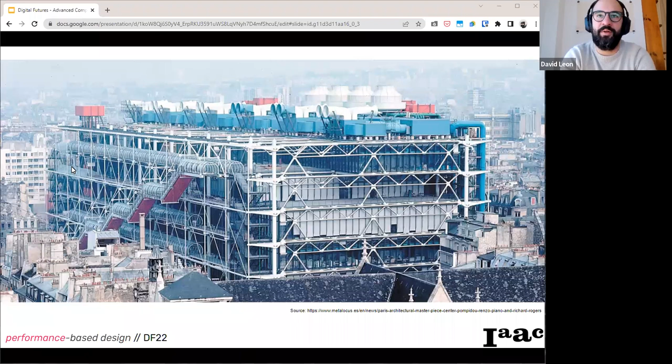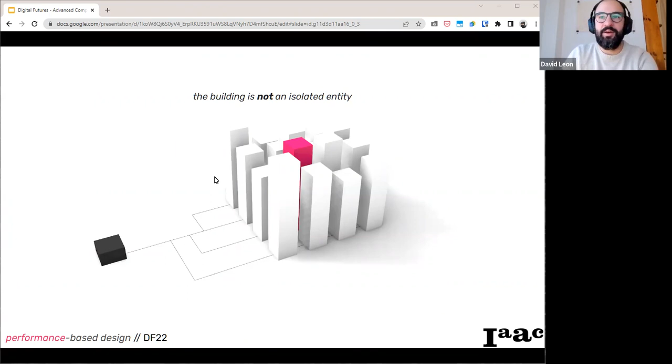That is to say that the building is not really an isolated entity, right? It's actually an entity that is part of a network, part of a community of other entities of the same nature, meaning other buildings, but it is also connected to a bigger network of relationships through energetic consumption, materiality, and its immediate context.

So a building nowadays, or even from the beginning of the history of buildings, has to consider its materiality. What kind of resources has it used to be built, to become a building? How does the building actually affect its context? Meaning, how does it affect other buildings, for example, by limiting or enhancing the energetical consumption of the other buildings.

A building also has a great impact in its community. And how much natural energy does it profit from, right? How much natural energy does it take? How much artificial energy does it consume from a network of energy consumption? That is something that is very well assumed in our days, right?

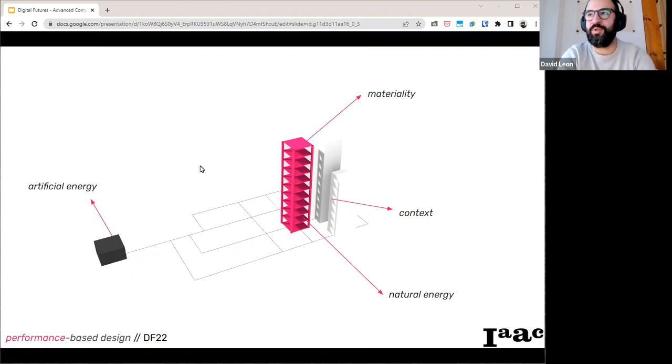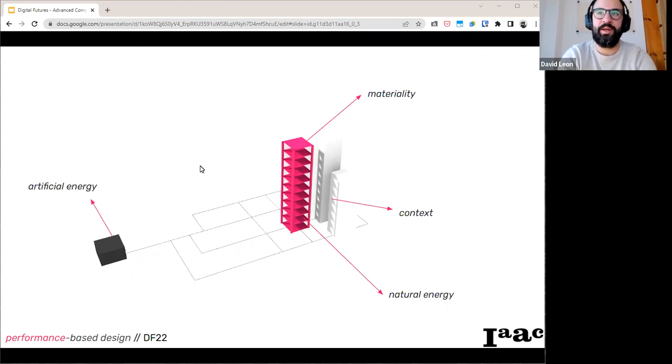That we can just plug a building into a network of energy, and the building will just provide us heat or cold, or power for our microwaves or our lights. But the very act of us subscribing to such a network also implies that the building in itself is part of something bigger than itself, right?

So if we translate these concepts from the ways in which the building is connected to its context, to its environment, we can start to talk about the different functions or performances that the building can have. In terms of materiality, what it actually takes for the building to stand, meaning structural performance, right?

In terms of energetical consumption, both artificial or natural, how much does the building interact with the environment, or environmental performance, right? How much energy does it take, or how much energy does it provide? And in terms of the context, how much impact does the building actually have in terms of the overall performance of its context?

By casting shadows on another building, a building might actually be subtracting from the overall energetical consumption of an urban space, or just by the main disposition of the building, it might have different consequences. That is something that I'm going to talk about a little bit more in depth in practical terms in the examples.

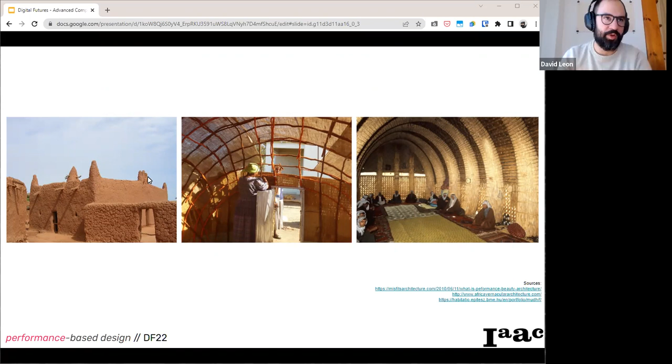Resulting in a specific shape that would be the direct manifestation or response to an environment, which is what we're talking about. And then, after many years, the decontextualization of such, where a lot of the ways that we build nowadays can be perceived as very repetitive.

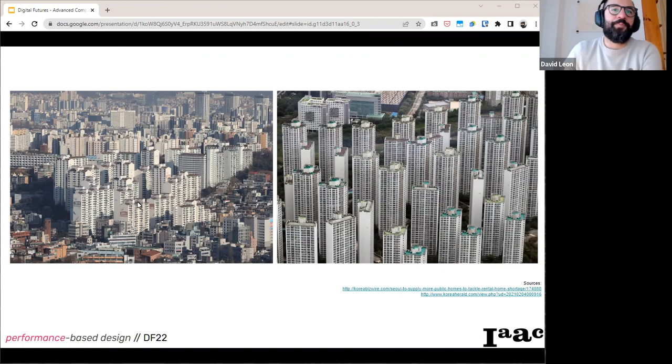We're basically not considering these very important factors anymore to produce our buildings, often for the benefit of profit or for economical motivation. Materially, energetically and urbanly, we have throughout the years somehow put these very important concepts aside in order to get the most of it.

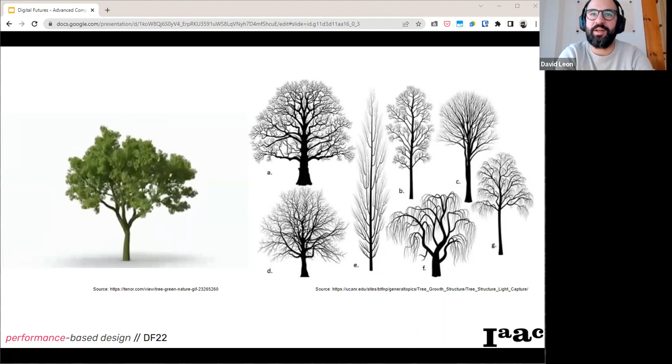So that's to say, a tree, for instance, according to the requirements that it might have, both structurally and energetically, is able to adapt its form and grow in the search for such requirements, structurally and environmentally, with the due process of adaptation. So you can see the manifestation of the same tree, for instance, in many different morphologies by the different requirements that it has in terms of its energy and structure.

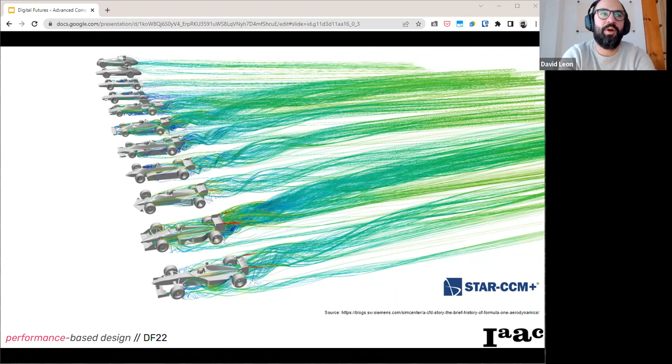What is interesting is that in the same example of cars, in automotive, this speed performance can also be quite tightly related to its energetic performance, because as you know, a car has to basically withstand its drag in order to overcome the friction that it has to move through, and by that it actually requires power.

That power comes from energy, and that energy comes from resources, which is basically always related to the context, even though that's immediate, like in the case of solar energy or electrical energy, or if it's not so immediate, like in the case of fuel, right? But in any case, the point being, the more performative in terms of shape a car can be, the less energy it will basically consume, right?

The more aerodynamic a car will be, the less effort it will take it to travel through space, faster, but also with less energy consumption. So the point being here that the shape of things is actually quite important for certain performances to be measured or to be improved, depending on the function that we see.

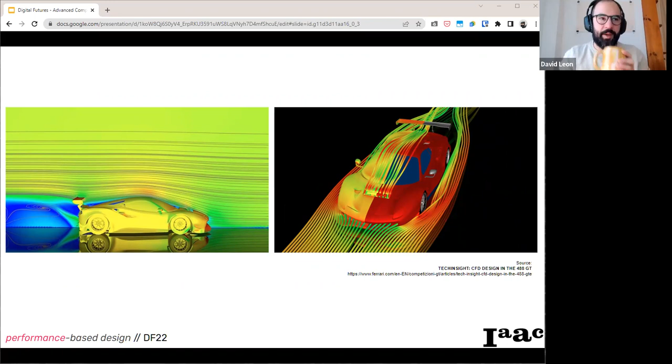This concept, of course, has been adopted in many industries, not just the car industry. For example, the aerospace industry, in which, of course, a lot of inspiration has been drawn from nature, right, to solve specific issues like aerodynamics or such. And I usually would play a video here that I'm not going to play today, which talks about how the bullet train in Japan actually had a specific amazing problem, which was that by being so fast going through tunnels, it would create what is called a sonic boom.

And because part of the engineering team included a biologist, it actually drew part of the shape of the bullet train in Japan, right? It drew inspiration from a specific bird, which is called the kingfisher, to adopt the shape of the nose of it in order to overcome these problems.

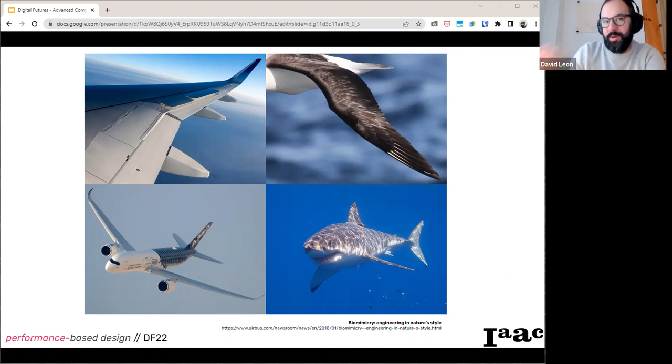Now, what you can see here in the images is something kind of in the same nature, but it's also very important to highlight here that biomimesis is not really the same as biomorphic, which means one shouldn't really fall into the trap that we must actually copy exactly the forms of nature that are out there, right?

One thing is actually to have the exact same shape of something, which is being biomorphic, taking the shape of something, and biomimesis is basically taking the inspiration from nature or from the concepts that are in nature to be able to adapt them to different domains, like is the case of the aerospace industry and many others.

Also talking about performance, but in this case structural, there is another example that is rather more close to us, which is basically the way that our bones are designed, right? And through this amazing principle of homeostasis, our bones are able to adapt structurally according to the different weight loads that we inflict on them gradually throughout our age, throughout our growth period, but also throughout different loads that we can inflict on these bones.

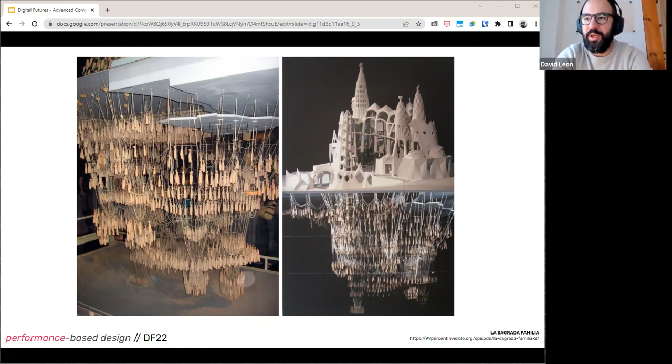Not only because of the aesthetics and the creativity of this formal process, but it actually encapsulates an amazing concept of performance that is quite simple, right? It was basically expressed by Hooke in Hooke's law: as the chain hangs, the inverted form would be the perfect shape to withstand gravity. And that is basically the challenge of the construction of the Sagrada Familia, to build such high towers and such complex dispositions into one building that is going to be probably one of the tallest buildings in Barcelona, designed by Gaudí in another age.

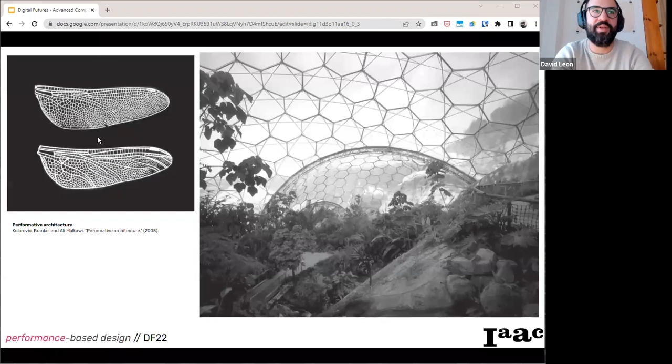This same mentality has been seen and proliferated all over the globe, not only the Sagrada Familia, for example here in the Eden Project, where by the biomimetic translation of certain principles, such as the wings of a dragonfly, you can actually expand and cover huge amounts of area, as in the case of these amazing domes in the UK. But there are other amazing buildings taking this principle forward.

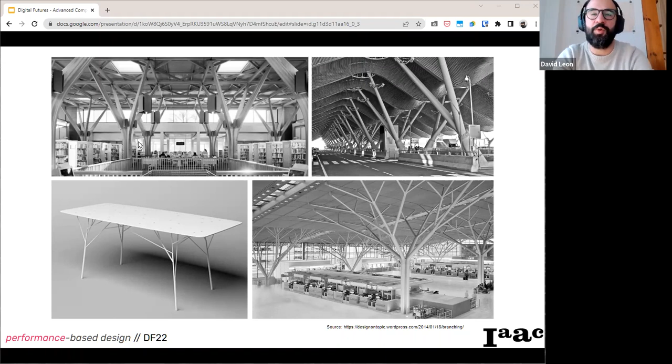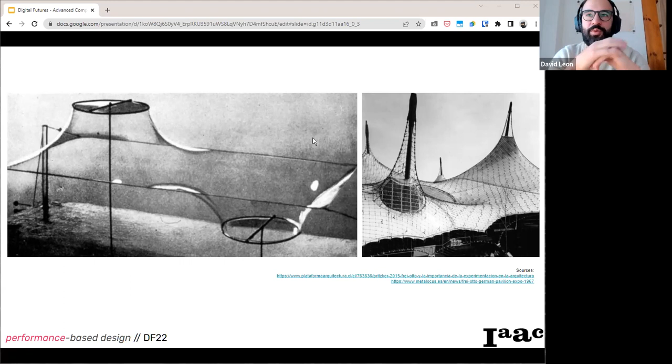So from the need for performance, what we have is another approach to design through form finding, an approach that already incorporates physical forces in prototyping, not necessarily computationally at this stage. In this example of Frei Otto, the soap bubble prototypes find other ways to incorporate material economy and material efficiency. The shape you see here is a minimal surface, basically the shape that takes the least material to cover this space.

So the difference is that, whereas before it would take a lot of prototyping and a lot of effort to challenge these notions and to test these notions, nowadays, through the inclusion of computation, this is something that we can do in seconds, right?

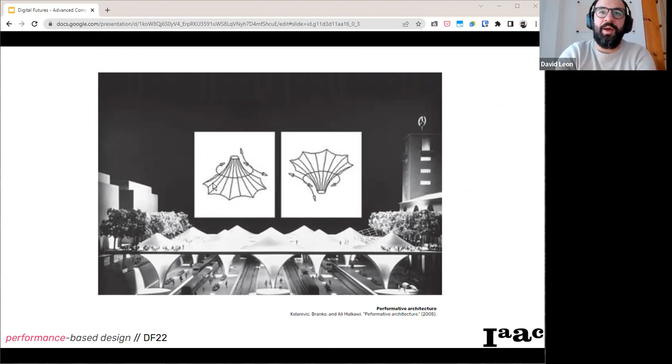For example, here I enter basically what I was talking about in the beginning of the presentation, which is how the tools that we have at hand can constrain or enable or even challenge different aspects of the designs that we have at hand, right?

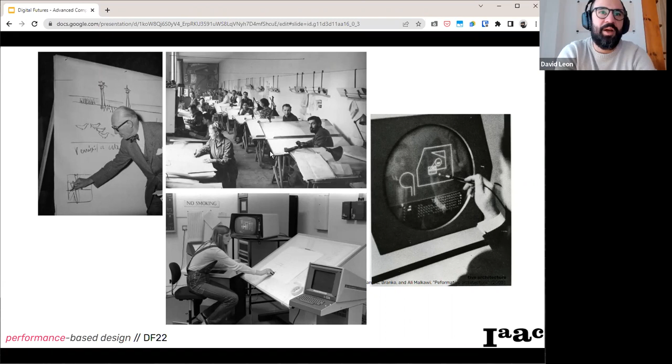And then the inclusion of CAD, of computer-aided design, which basically transferred all of these efforts into the computer, right? First, by merely replicating the same things that we were doing by hand. At the beginning CAD was just a straighter, more precise ruler, like what you would see in AutoCAD classically, right? But then eventually we started to see architecture also as data, right?

And nowadays, the same model that it took Frei Otto months or even years to produce, we can build in a very simple definition in Grasshopper in 2 seconds, right? And get a very nice approximation of the shape that gravity can produce into a form, by hanging it or by inverting it, like we were talking about with Frei Otto and Gaudi.

And this is basically the true power that we have nowadays at hand. Most of us, if you're a student even more, have access to such tools, not only economically, but in terms of the computational power required to run them, and more importantly, the knowledge that it takes to run this is widely available to you, right?

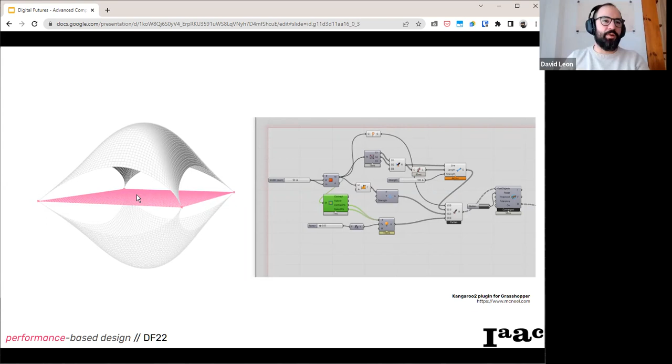I'm not sure how familiar you already are with computational design. I'm sure you're very well versed, but the only thing you need to make this simulation, which is actually a physical simulation done in the Kangaroo 2 plugin, is the composition on the right-hand side that you have to make in this particular software called Grasshopper. This will take you less than 5 minutes to make, to get a very approximate result of the same.

Not only that, but we can actually benefit from a huge ecosystem of tools that not only do Kangaroo physics, like the one you just saw, but provide a vast ecosystem of simulation tools and form finding tools for you to explore and benefit from, which I would hope would be for the sake of performance.

And this is basically what the talk is about: the computational tools that we have now at hand, which are very widely available to you, should be used for striving for performance, which in the end turns into sustainability, right?

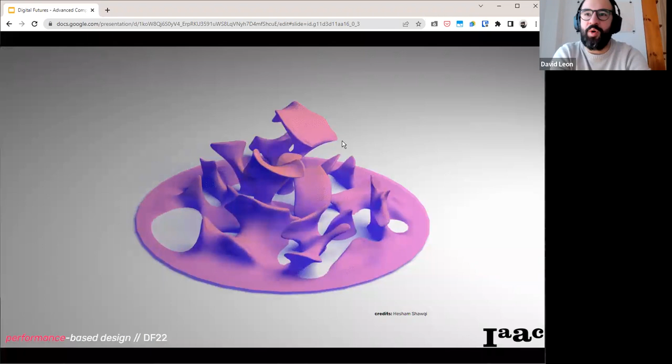So here we can see a quick snapshot of a few plugins available in Food4Rhino, which is where most of the Grasshopper plugins live. But more than a specific promotion of any plugin, it's just to say that we have these tools available to us quite easily and with no great cost. These tools allow us to simulate growth, simulate behavior, right?

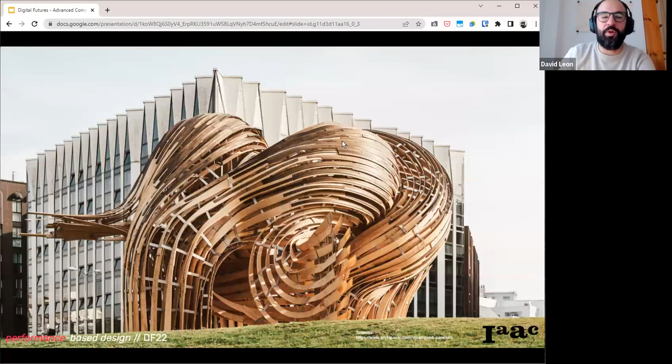These tools allow us to create very complex shapes that normally wouldn't be possible. Credits here to the steampunk pavilion in Tallinn, which was recently standing there in Tallinn, which is a feat not only because of its material complexity, but because it actually requires advanced tools for its fabrication. In this case, this particular pavilion was only possible to be constructed through the use of augmented reality for the formation and location of each of these bent planks.

And this complexity doesn't necessarily have to be curvy or wavy or of a particular aesthetic, but can actually just derive from the complex disposition of very simple shapes, like in this case, wooden struts that generate something very complex.

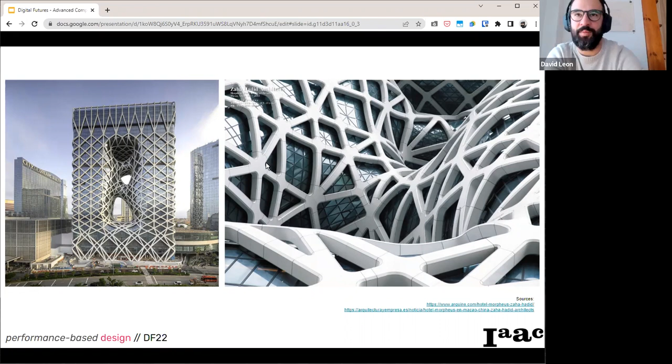And even beyond the pavilion or the demonstrator scale, the same tools that I was talking about before, Grasshopper, for example, and parametric tools can be used to create buildings as a whole, such as the case, for example, of the Morpheus Hotel in Macau by Zaha Hadid, which in great part was actually designed and made with the same tools that you have in your computer today, not only in its very complex facade, but also in the building as a whole.

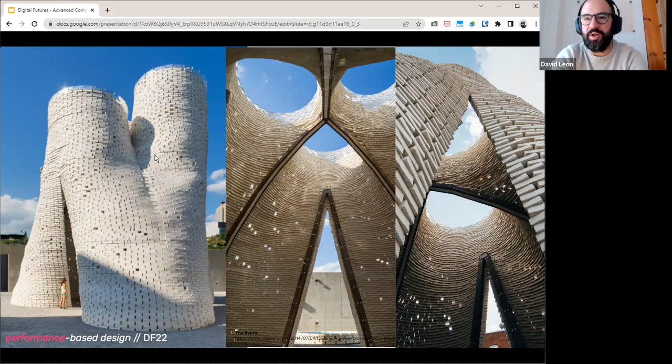Some of the work can also be seen in terms of the material by the introduction of living systems, right? In this case, using mycelium blocks to create complex shapes. And this also talks about material performance, because each of these blocks consumes less energy than the usual blocks that we would be using for constructing such shapes, because they have been grown by nature, right?

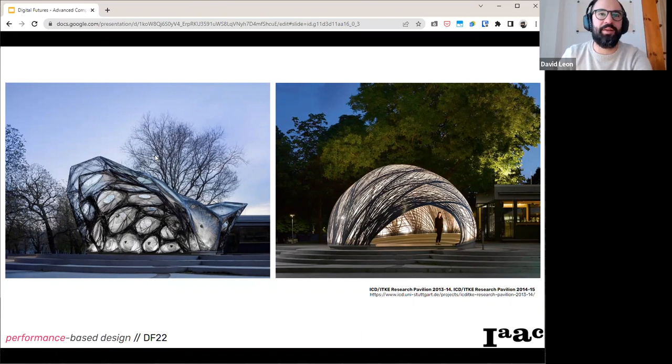And more formally speaking, also the amazing work that's been done by the ICD and ITKE, which I think you guys are very familiar with. I had the pleasure to work on these two pavilions when I was a student, and I can attest that beyond the aesthetic formality and final results of these very nice pavilions, there is embedded a huge deep study on the performance of these materials and the performance of these structures, right?

On the left hand side, an amazing effort to challenge and develop computational tools for performance, both materially but also computationally. And on the right hand side, being enabled only by novel fabrication techniques, like in this case of this bubble, a 6-axis robot arm laying fibers inside of the bubble to reinforce it so that it can withstand when the air pressure is taken out of the bubble.

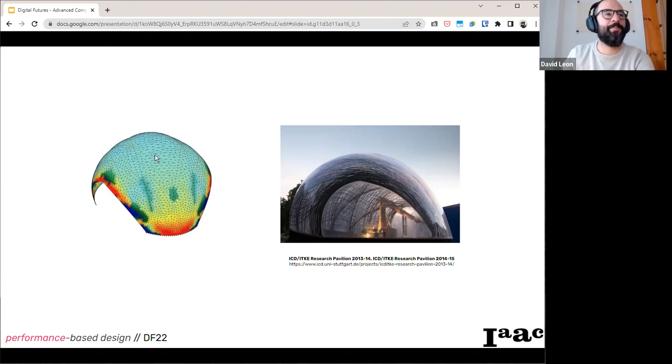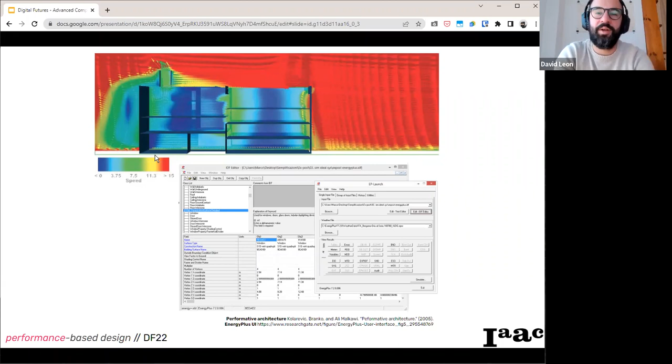What used to take us, even just a few years before, a very difficult process of simulation, in this case CFD simulation, thermal simulation through EnergyPlus, nowadays can be very easily accessible through an amazing ecosystem of plugins and tools that are not only free of cost, but really well documented and available to you, right? Which somehow lowers the entry barrier for the use of these tools, so that we can start to incorporate these simulations and these concepts into each of our designs without much effort, right?

So here you can see a CFD model made by Ladybug, right? Just having a basic understanding of how the wind flows in a building can actually affect the way that you would dispose a building for energy performance, right?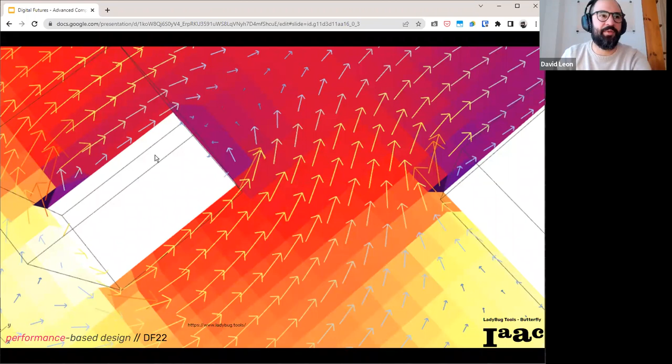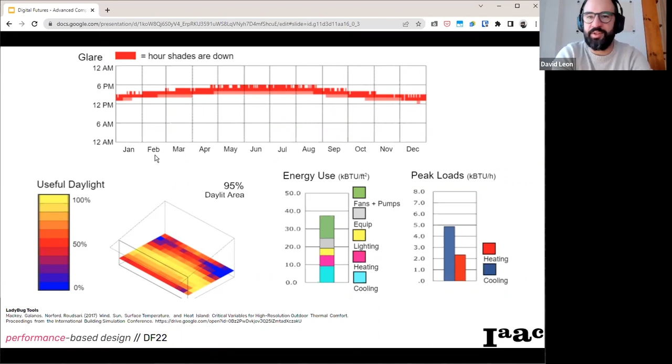These tools give us not only an insight in terms of the immediate context, the context overall where our project sits in, but also an idea of how it actually affects the whole urban context of our building, which relates back to what I was speaking about in the beginning, right? By subjecting our projects to wind simulations or thermal simulations, we can gain an understanding of how these projects behave in their own context, right?

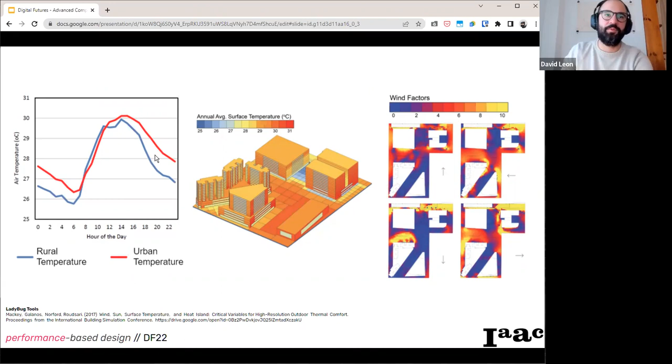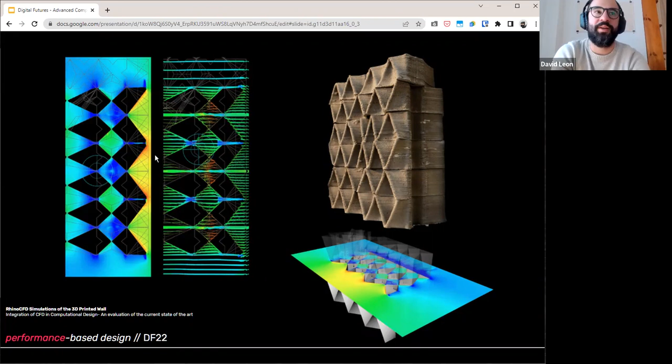And for example, this type of notion is something that we in IAAC... this is a picture from one of the projects that we developed at IAAC. It informs not only the form that a part of a building has; by adding computational fluid dynamics simulations to the design process in early stages, it can actually tell you which is the best behavior for the shape of a building. But the same notion applies to larger scale buildings, and especially when we're talking about wind performance and aerodynamics, it has a huge effect with tall buildings, right?

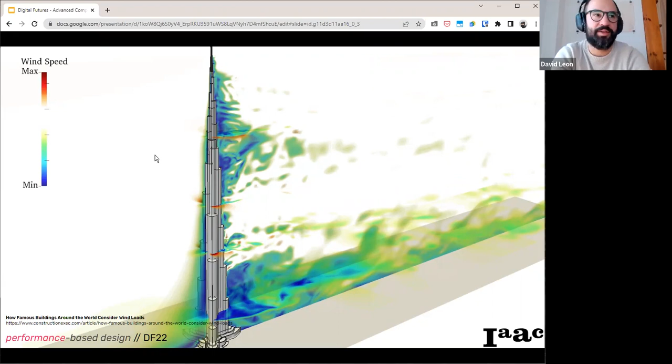Aside from environmental factors, plugins like Karamba in Grasshopper allow us to quickly query different versions of structural elements, like in this case the parametric truss: how many elements do you actually need for this truss to work, and what is the immediate result of such an element. This is at the palm of our hands nowadays with these tools.

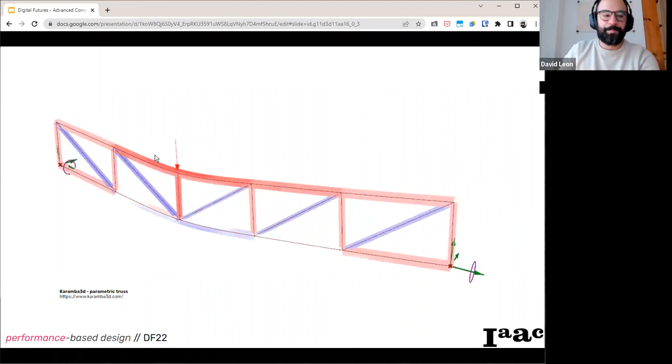Now, towards the end of the presentation, I want to tell you a little bit of how we actually apply these concepts in the master's that I run, the MaCAD, by looking at two projects specifically, right? First, the usual methodology our students learn, especially in the first module of MaCAD, is to try and gain an understanding of the context we're talking about when we're placing a building. So analyzing a specific city or a specific site is important, and it also requires our analytics as a human being or as an expert to read this data, right?

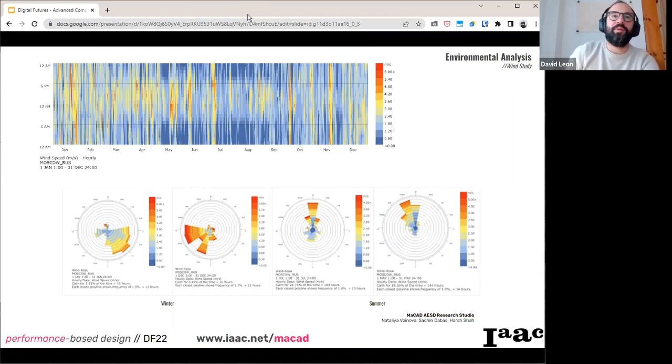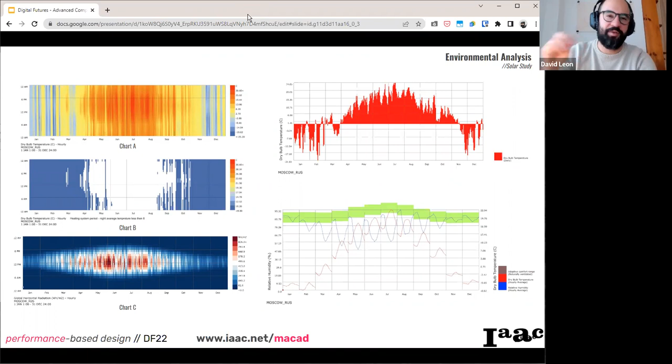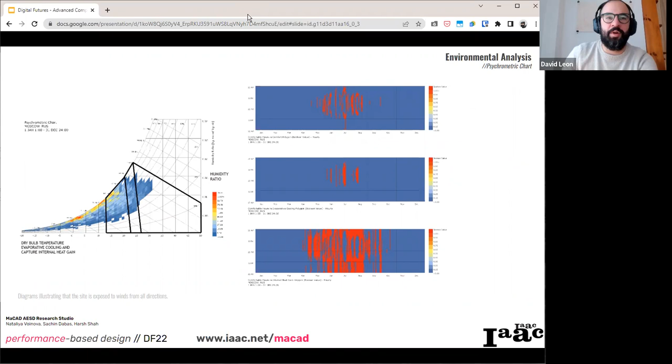But I would say the most important part, the higher note of all of this, is that we're actually understanding architecture as data, right? So to start with, we start with data collected from the site, which we can visualize already by using Ladybug, for example. And this gives us an understanding of what could be the particular requirements for a specific site. In this case, we're talking about Moscow because our students are from all over the world, and they develop projects from the city where they're located. And they gain understanding of the main environmental factors they have to address in their buildings in terms of thermal and wind factors.

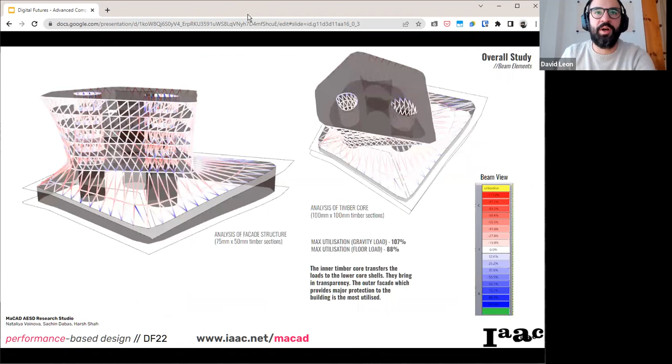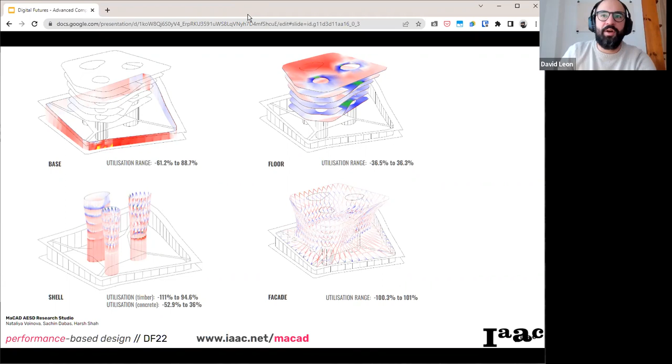But later on, they start to propose their buildings in early stages of design, right? Subjecting their proposals to structural analysis through Karamba, which is one of the two plugins I was speaking about before, and coming up with versions of the same building, in order to find metrics they can use to check the least amount of material or material utilization they can achieve, while achieving their aesthetic purposes, their final intention as a building.

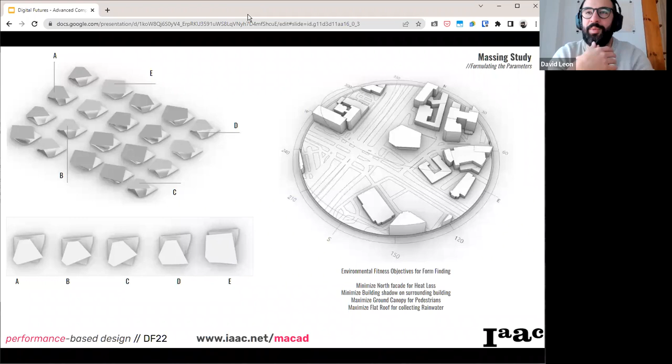The nice thing about converting architecture or form to data is that it allows you to explore many different versions of the same building or the same concept. By formulating a parametric model that encapsulates your concept, you can start to play with these parameters and move them around to see different variations of the project, and by submitting these variations to environmental analysis and structural analysis, you're able to come up with the one that is most performative. So if you're striving for energy performance, you might find the shape that is the most energetically viable. If you're striving for structural performance, you might find the one that has the least amount of material according to the material that you specify.

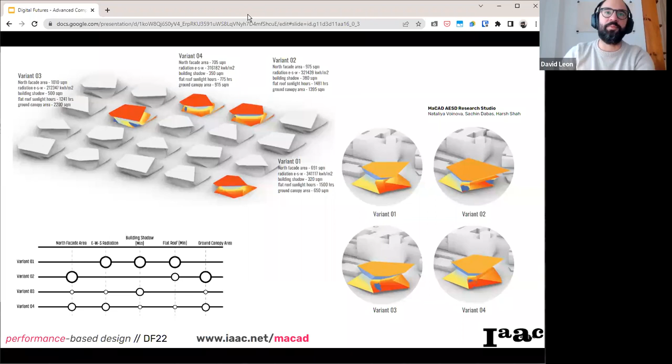If you include both of these, then you will basically come up with a gradient, or maybe a kind of a matrix of selection of projects, like the one that you see here, a catalog of projects in which you can choose what you want to prioritize, right? And this, I would say, is probably the first approach that we usually have to parametric designs, but also performance-based designs.

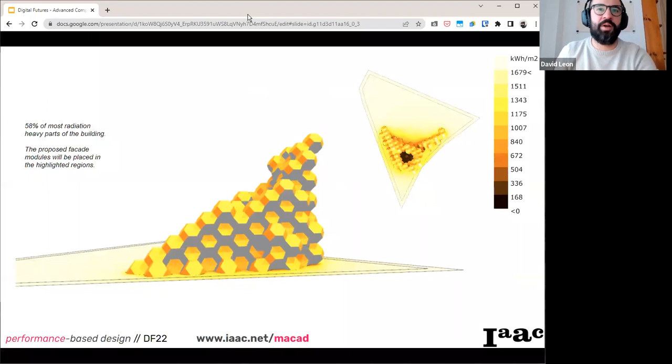We make a real effort to couple these two notions, so that parametric design doesn't just become a new style of representation or a formal outcome, but that it actually provides us with data that we can analyze, so that we can compare and find the most performative version of our building, right?

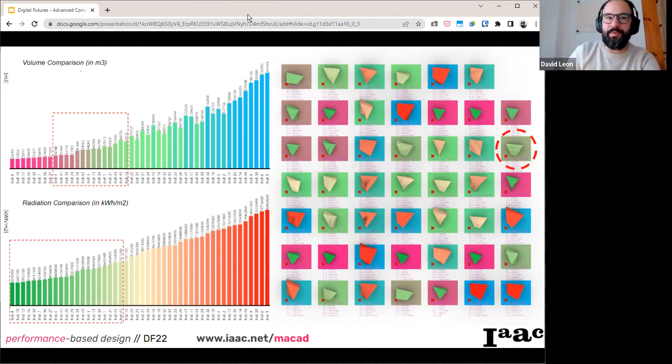And this is important because, in my personal view, there is a lot of formality. There's a formal approach to parametric design, which is basically just the creation of complex buildings just because. But I think it's important that we have the conscience to include relevant data that is hand in hand coupled with sustainability, so that not only can we achieve complex shapes that look nice, but we can actually come out with the best version of our building in terms of the performance that it has, right?

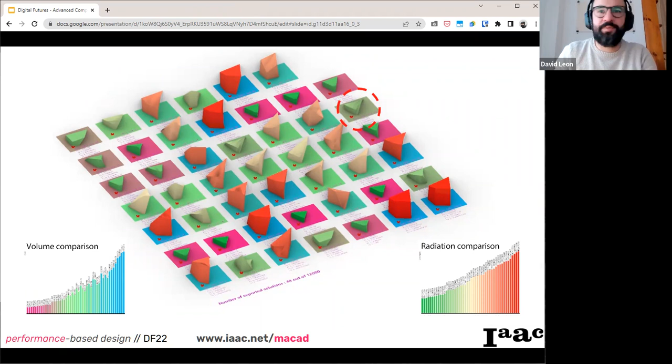I'm moving forward to the next project, because I do want to leave a little bit of time for discussion in the end. This is another project, but this one developed more in the urban scale and in the third module of MaCAD, which deals more with machine learning.

Of course, the three modules of our program are always tightly related to sustainability and to using tools first, but then also creating tools of our own that challenge the concept of performance and sustainability in every scale, right? So from the use of parametric tools like Rhino Grasshopper, Ladybug and Karamba, to, in this final stage of the masters, the students' development of their own tools through machine learning and web development, to have a different approach of analysis in every scale, but in this particular case, in the urban scale, that can later be brought to the final end consumer through web applications.

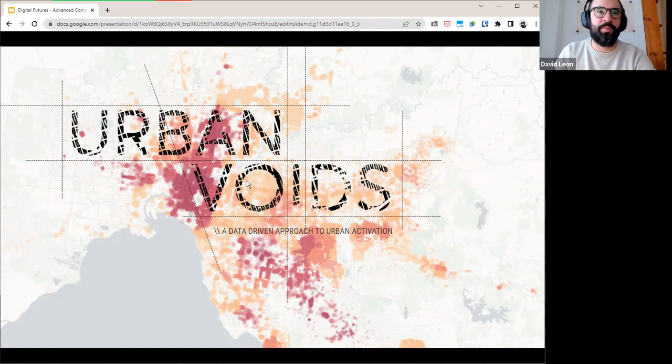So in this case, it's about providing the users of these tools a more comprehensive view of the city by calculating different distances of walkability and shifting the layers of the city, not only looking at the city as a set of distances that we can travel, but by including different types of buildings and amenities in these walkability traces that one can go about in a specific city.

So our students receive the knowledge to go through this whole complex workflow of collecting data through open source data sets like OSM, which is OpenStreetMap, right? They collect this data, they clean it, and then through network analysis, they find different walkability scores. And then by using unsupervised machine learning, they start to cluster these scores into segments that they later pour into the web, into Mapbox, so that they can visualize and propose new locations and types of amenities in a specific city.

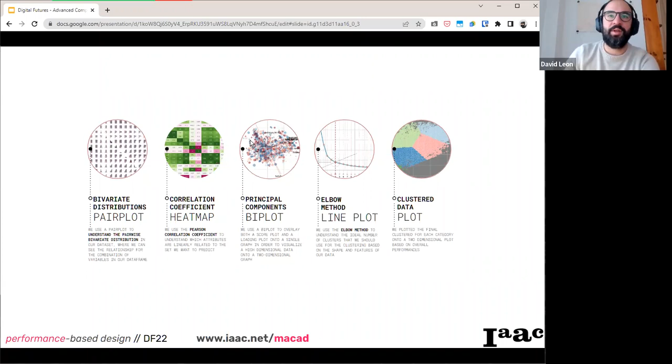Now, I wanted to include this because I think the only way to look at this type of project is by becoming a little bit of a data scientist and starting to look at these high dimensional models in a way that we can analyze and display. So they learn about data representation through scatter plots, pair plots and heat maps, using different indexes of correlation coefficients to understand which attributes are related to each other, right?

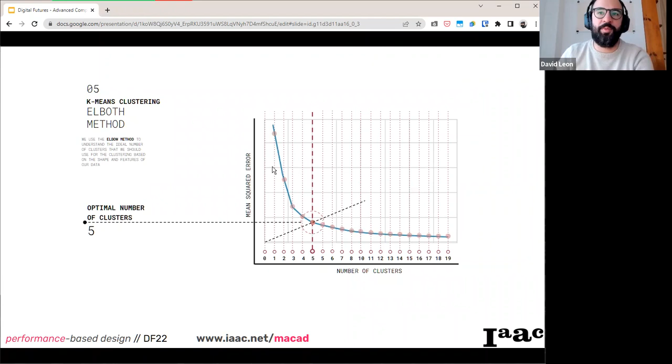And all of these analyses that might seem very complex are actually really helpful later on to determine, for example, how many clusters the unsupervised learning model should have. All of these analyses are helpful for our students to become no longer the consumers of these tools, but the providers of these tools, right?

So that the end user can actually have a view of the city that is not the common view of the city. They can actually see where in the city all of the health aspects of the city are located. Where is the educational cluster? Where is the recreational cluster? And different categories that our students want to investigate in the city, for which they collect data, and then they bring it eventually to a website so that it can be used by users.

This is important for me as an educator, but also as a researcher and as a developer of tools, that the tools that we develop, both in this project and in most of our projects, usually become apps or tools for consumption that can be useful, can be consumed, or can become part of the way that we actually see cities nowadays.